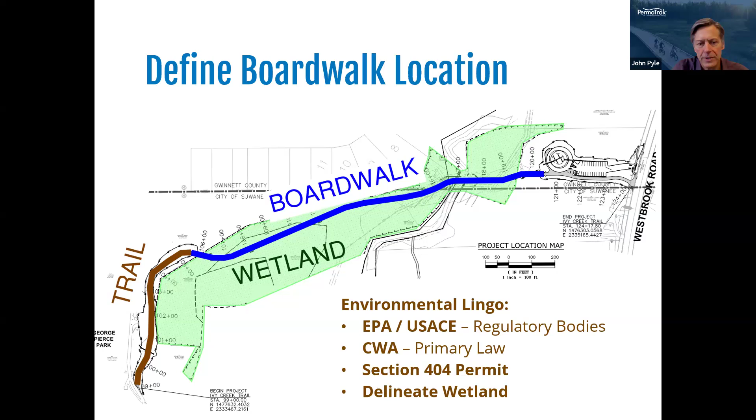The authority for that was granted through the Clean Water Act back in 1972, and there's a Section 404, which is that permitting process, which helps to define that delineated wetland or stream boundaries. This one slide could be its own one hour lunch and learn on how to navigate the environmental and the regulatory hurdles, and there are people who are much more familiar with that than myself. But it's really important to have a good wetland consultant on board for these kind of projects.

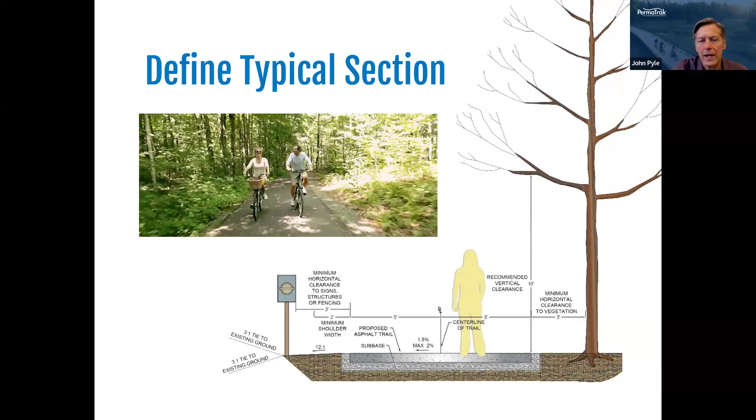So once you figured out that you do have this wetland body of water that you have to go through, part of your trail definition is you have to think a little bit about the usage, which will help inform how wide that trail needs to be. If it's just for single use hikers, it may be more narrow, but what we often see is if it's multi-use with hikers and bikers, it might be 10 to 12 feet wide. You also oftentimes need to consider some buffers on the shoulders for vegetation or signage, as well as overhead obstructions.

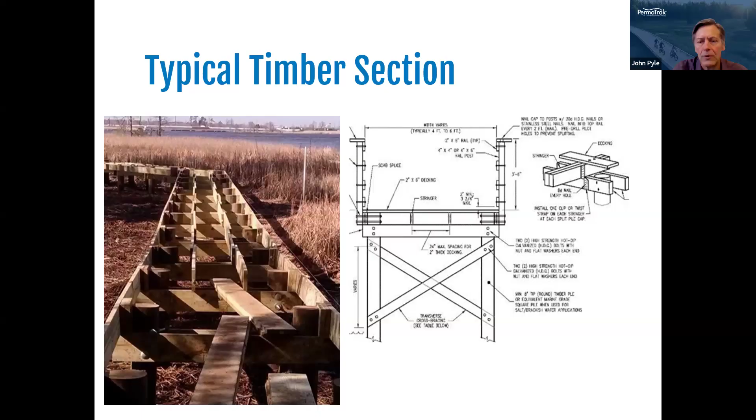Pivoting to the structure, what we typically see for boardwalks is three general types: timber/wood traditional, composite, or precast concrete. You've probably all seen timber boardwalks—here's a good example of what that looks like. You'll have stringers running longitudinally, often on a 16-inch spacing, spanning from pier to pier, usually about a 10-foot span between piers, with a wooden board decking.

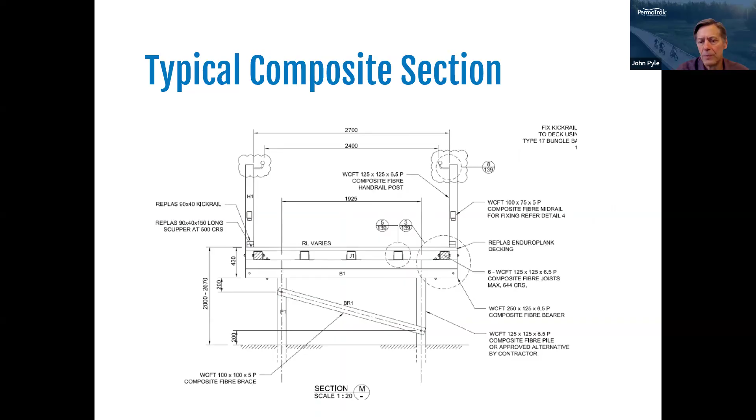Composite structures are very similar to wood in that you'll have multiple stringers, or multiple longitudinal members, giving the structural support, and then a decking that makes up the walking surface. All of that will be supported by some type of foundation with a header—you need the headers to provide support for the multiple stringers. Again, usually you'll see spans in the 10 to 12 foot range for both wood and composite.

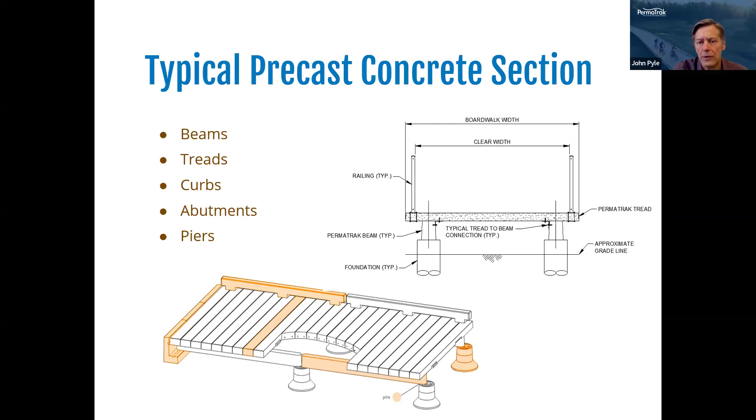The other option we see are precast concrete boardwalk systems. These consist of a two beam line structural support rather than multiple stringers on a 16-inch center—you see that cross section on the right hand of the page. The two beam lines will span from pier to pier. With a precast system, typically you're seeing longer spans, 20 to 24 feet is more typical for a precast concrete boardwalk. Then you'll have treads or deck members that make up the walking surface, running in the direction of travel, all supported by some kind of foundation system. I'll touch on foundations a little further, but those are the three main types of systems you might see from a material standpoint.

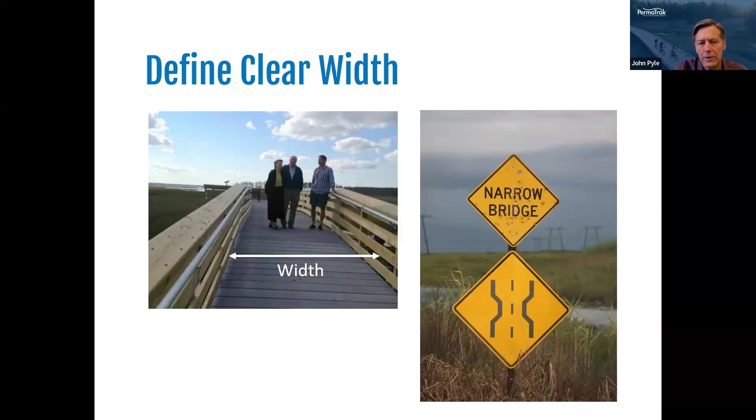Another thing to think about is your clear width. That'll be driven by the intended usage of the trail—oftentimes, for a multi-use trail, it's 10 to 12 feet wide. Clear width is that distance between the handrails or the curb. As the sign on the right shows, you want to avoid a narrow bridge. So when sizing a structure, either a bridge or a boardwalk, you want to make sure it has sufficient structure width so that the clear width between the handrails matches up with your trail approach, so you don't create an obstruction.

For the codes, there are really a couple of different codes that come into play when looking at pedestrian bridges—a boardwalk is simply a type of pedestrian bridge, if you want to think of it that way. The main overarching specification is the LRFD Bridge Design Specifications, the big highway design that AASHTO publishes. Within that document, there's a specification specific to pedestrian bridges, which is what we always recommend following for a boardwalk. There are also references to IBC, the International Building Code, which sometimes comes into play as well. Your consultant or designer on the project can help guide you to which one's most appropriate.

Within those guide codes, you'll see references to design loads to design for. For AASHTO, it'll be a combination of a 90 PSF pedestrian live load, and a vehicle wheel load based on the clear width of that boardwalk. If your structure is 7 to 10 feet clear, that would be an H5, or 10,000 pound vehicle. If you're more than 10 feet clear width—say one of these multi-use trails at 12 feet wide—AASHTO would recommend using a 20,000 pound, or H10, vehicle. This helps allow maintenance vehicles to traverse the structure.

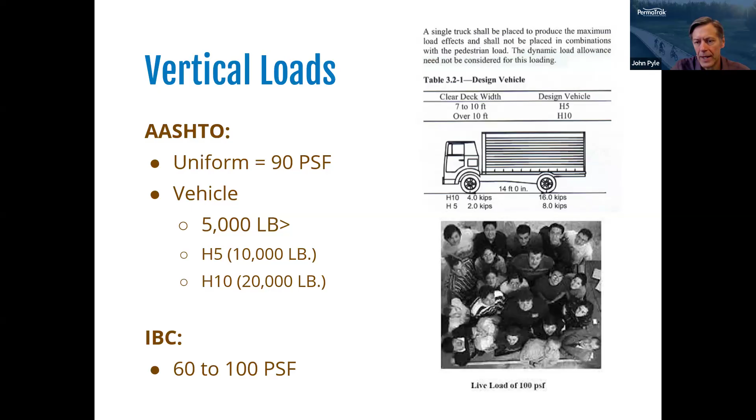IBC is a little bit different. IBC typically just refers to the pedestrian live load, either 60 to 100 PSF, depending on usage. That picture on the bottom right is a good representation of what a 100 PSF load looks like. Think of an elevator, people standing shoulder to shoulder - that's kind of what 100 PSF would feel like. We see that when it's more of a gathering space where you might have events with people congregating on that boardwalk.

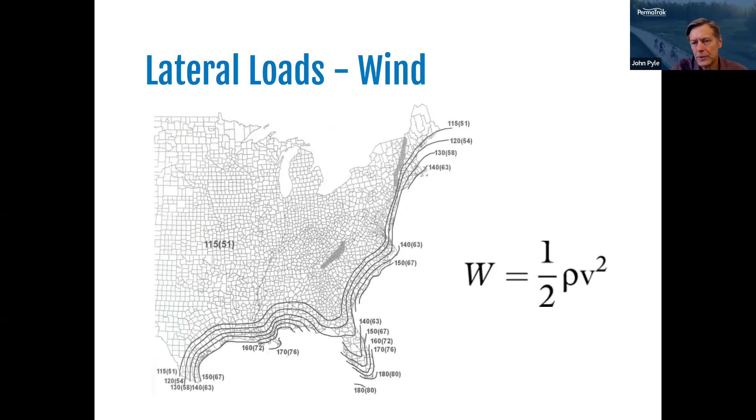Other types of loads that may come into play would be wind. We have a uniform wind load that gets applied to all structures, and as you get closer to the coast, those wind loads will increase. So just knowing where you are in the world helps inform the structural engineer on what the appropriate wind load would be. Certain areas we get into seismic loading.

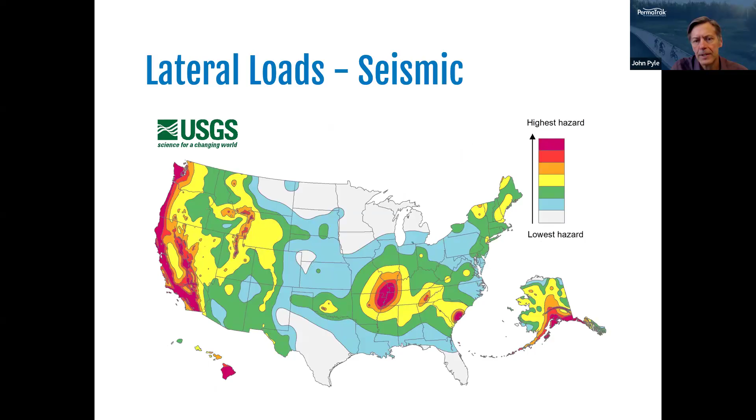Certainly on the West Coast we're all familiar with the earthquake threat, but you'll notice there's some pretty significant seismic activity on the East Coast as well, particularly down in the Charleston area - it's a very active fault line. Western North Carolina has some seismic considerations as well. Again, just something that needs to be taken into consideration.

Other types of loads would be hydraulic loads. We see that quite a bit when you're spanning a river or a stream - you need to think about that. If you're anticipating maintenance vehicles or emergency vehicles accessing the structure, braking loads or braking forces come into play. In some locations, mountainous areas or out west or up north, you'll see a snow load, which is basically another dead load you have to account for.

And then there's also temperature and shrinkage considerations. Structures can grow or shrink based on temperature, so the longer the structure, the bigger that impact could be. It just gets taken into consideration.

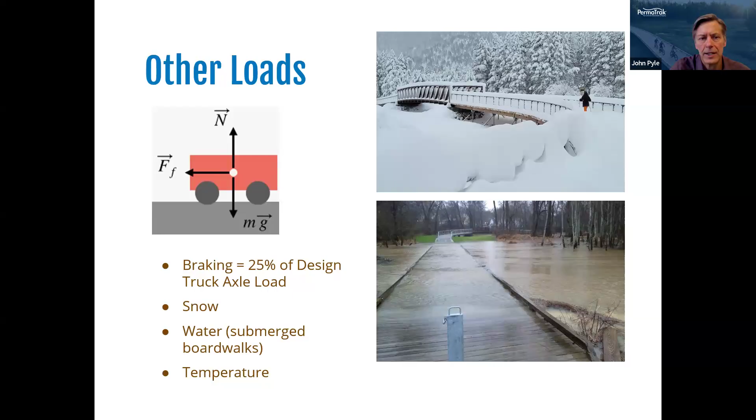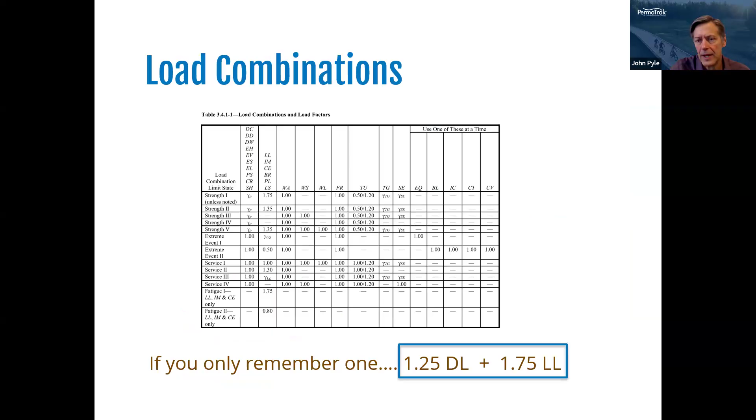To sum up the load combinations, just keep in mind that once you have the dead loads, which is just the weight of the structure, and the live loads, the vehicles or the people, then a factor gets applied to each one. You have a factor of safety so that there's reassurance the structure is going to perform.

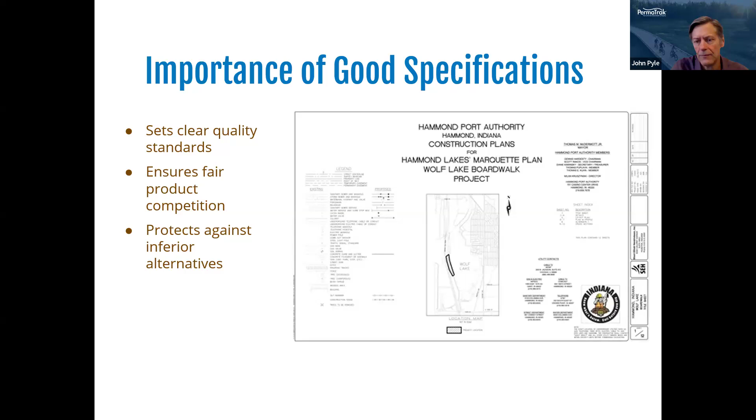Another aspect we always recommend is making sure your project has a good set of specifications. It helps set a clear quality standard not only for the structure supplier, like PermaTrak or any other entity providing the structure, but also sets the standard for the contractor, helping them understand what you want as an owner. This ensures that when the project's built, you get a structure delivered that is what you were anticipating, and everybody is on the same page from a bidder standpoint and a manufacturer standpoint, with clear specifications that also protect against an inferior alternate being proposed that you may not have wanted on your project.

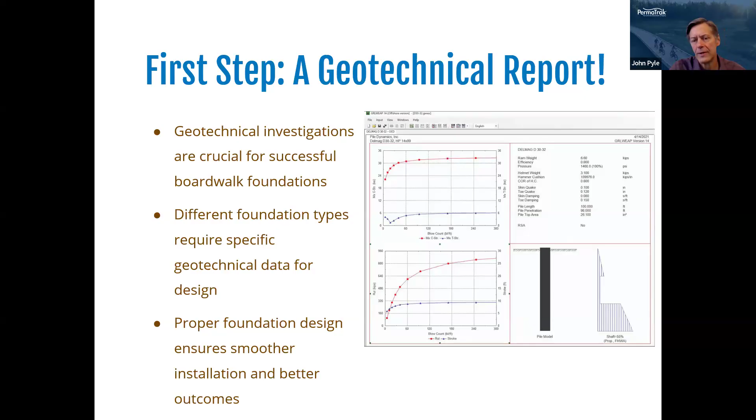I mentioned foundations earlier. One of the most critical parts of any structure is what's holding it up. This is a very big cost driver, not only for the materials of the foundation, but also for installation by the contractor. Really, the only way to understand what your foundation needs to be is to get a geotechnical report done, and we always encourage getting that done early in the process - having a geotechnical engineer go out, do some borings at the location of your bridge or boardwalk, and then make a recommendation on what the best foundation type will be for your particular project.

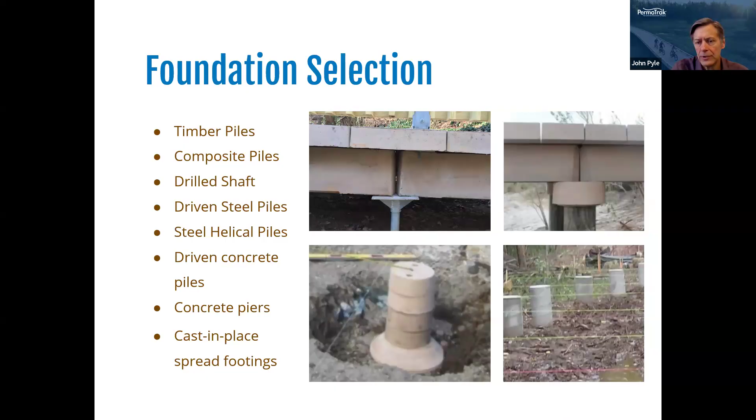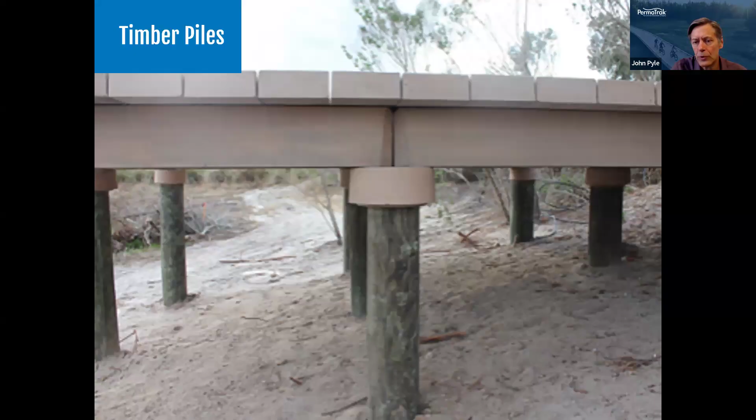Here's a good look at some examples of the different types of foundations we most often see - everything from simple spread foundations, at grade or just below grade, to driven deep foundations. As you can imagine, there's a wide range of cost associated with these different foundations. Deep foundations, pile types - these are going to be your more expensive foundations, but oftentimes, especially when you're in wetland areas with very poor soils, it's just what you have to do to support the structure.

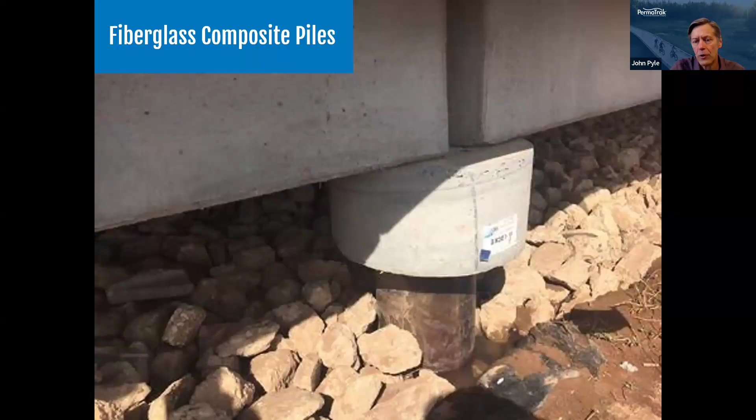We see timber piles used quite often. Fiberglass, the FRP fiber reinforced polymer composite piles, are a good option. Drilled shaft concrete or concrete caissons are a nice option when you need lateral stability, when you have hydraulic forces or seismic forces that have a high lateral component.

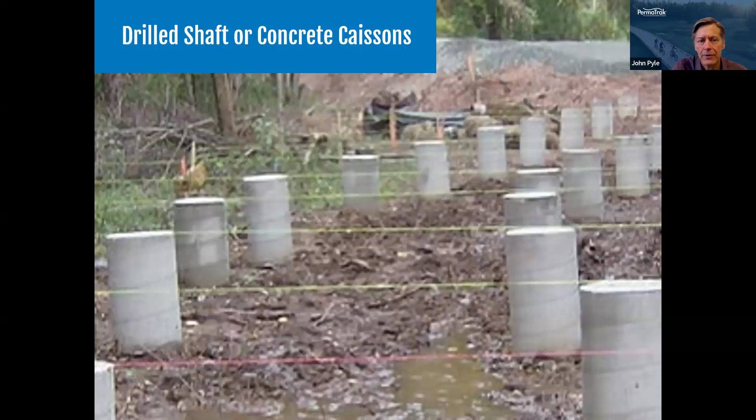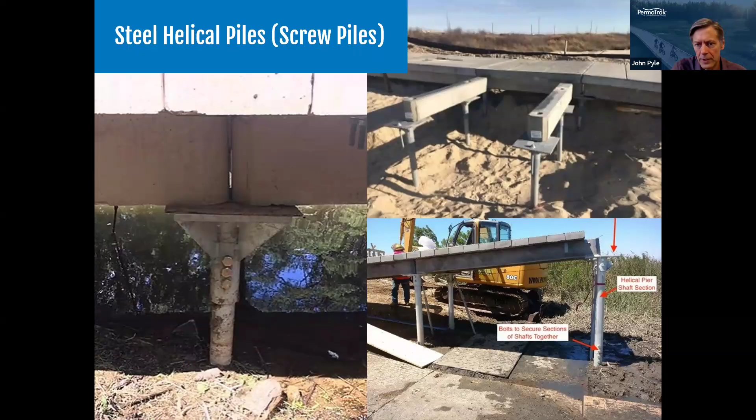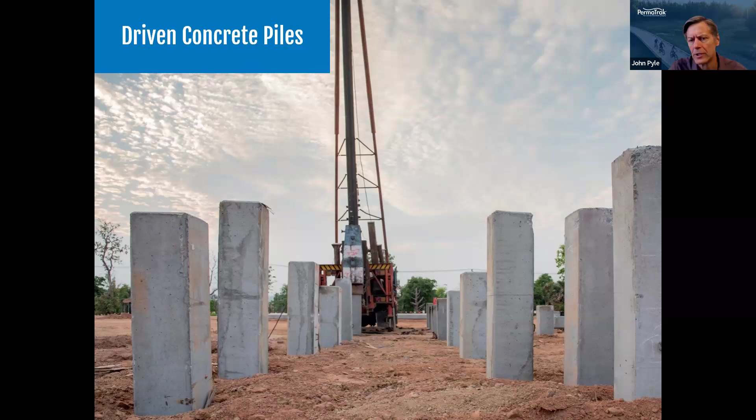Driven steel, either H piles or pipe piles, we see quite often. Helical piers is a system we see being utilized more and more. Really it's a deep foundation, but it doesn't require the heavy driving equipment you see with a driven pile. Lastly, you can drive precast concrete piles, pre-stressed concrete piles. We don't see those as often. More often you might see those in a coastal environment where you have deep requirements to drive and high lateral forces.

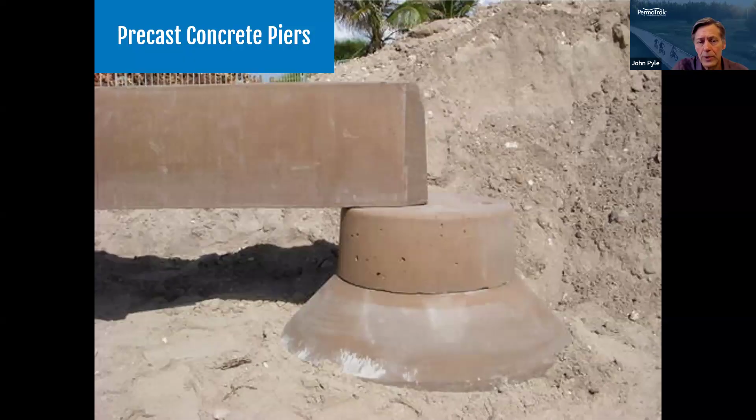Shallow foundations are probably going to be your most cost effective, but their use is a little limited and strictly driven by your geotechnical conditions. You can have a precast foundation or a cast-in-place concrete foundation. Either of those would be sufficient or a good option for you.

The other question that comes up is whether you need a handrail, a curb, or anything at all. This goes back to the ADA requirements that most designers follow. If you're less than 30 inches from the walking surface to the existing ground, you don't really need anything - it's a safety consideration. Oftentimes we'll see a curb utilized just to keep people from accidentally stepping off or pushing a stroller off the side of the boardwalk, so it's a good way to keep people on the structure.

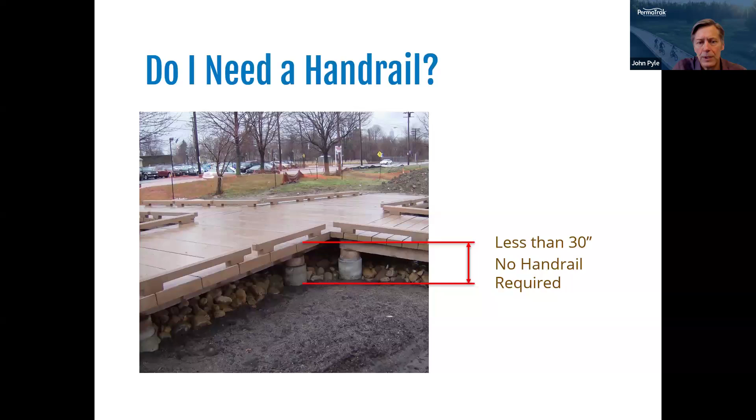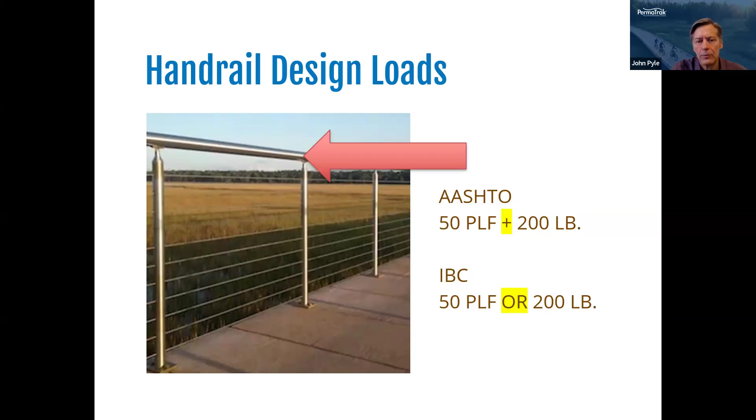When you exceed 30 inches, then you're into a railing for fall protection. Much like I mentioned with AASHTO and IBC design loads and codes earlier, there are design codes for railing as well. AASHTO applies two loads simultaneously - a 50-pound per linear foot line load plus a point load of 200 pounds. IBC looks at those independently, so it's a different way of applying the loads. The AASHTO load will result in a little more robust railing. The IBC works fine, but the AASHTO loading is a little more robust, and we see that more often with linear transportation projects.

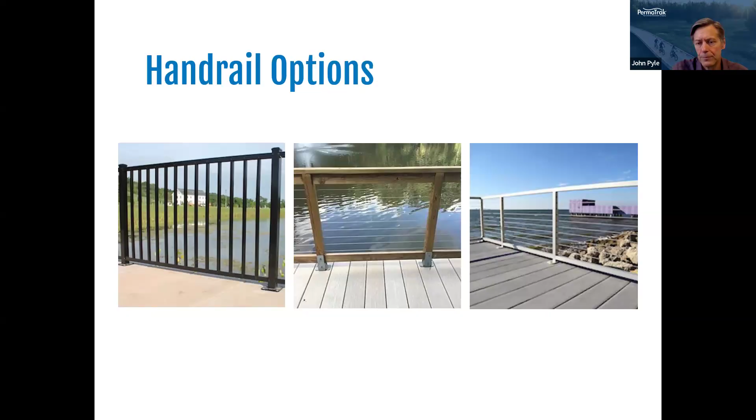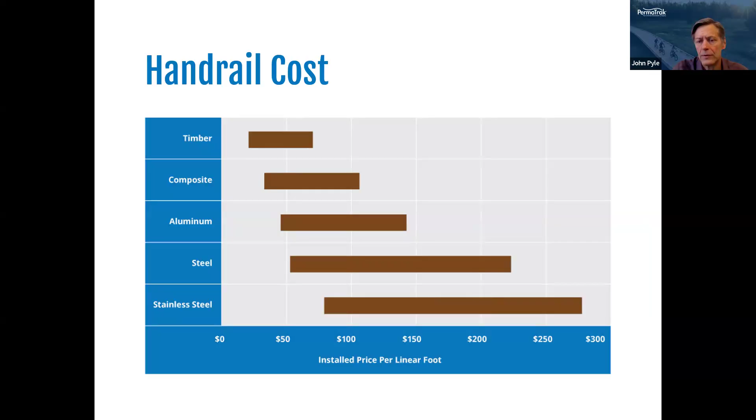For handrail options, you can literally use any type of handrail on a boardwalk you'd like from an aesthetic standpoint - metal, wood, aluminum, galvanized steel. As with anything, the material does have a cost implication. The most cost-effective approach would be a timber handrail. You'll have to do some maintenance and possibly replace it over time, but it's more cost-effective than, say, a fully stainless steel system with a frame and stainless steel cable. So consider the aesthetic, the cost, and the future maintenance of that handrail.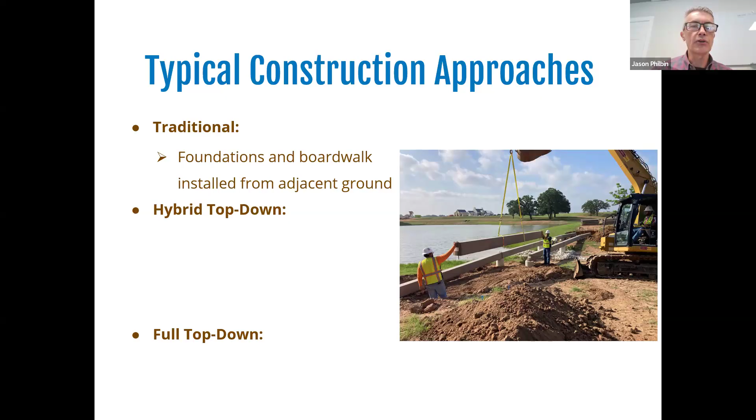Contractors love that. Now, if you do a hybrid top-down construction process, think about your wetlands where you want to put a boardwalk. You might say, 'we're limited to a corridor, and limited to the disturbance we can do to the ground.' This goes back to your permitting requirements. But ask: can the design and construction team build the foundations from the ground, then get out of the ground and set all the components from the top?

You can see here in the picture, the foundations were concrete piers, all done from the ground. Then the contractor came back and proceeded to crawl across the top of those foundation systems and set those pieces in front of themselves. This slows the process down and makes it more expensive, because time is money in the contractor's world.

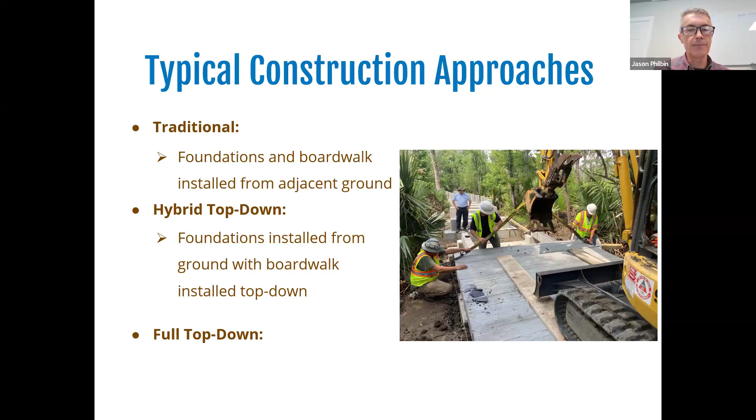The third type is what we call full top-down construction. If you have the most extreme permitting restrictions where you're not allowed to even touch the ground, sometimes you can't move any dirt. We have that going on right now in Atlanta, Georgia. Everything has to be installed from the top—the foundations and all the components—everything delivered from the top, theoretically not even touching the ground.

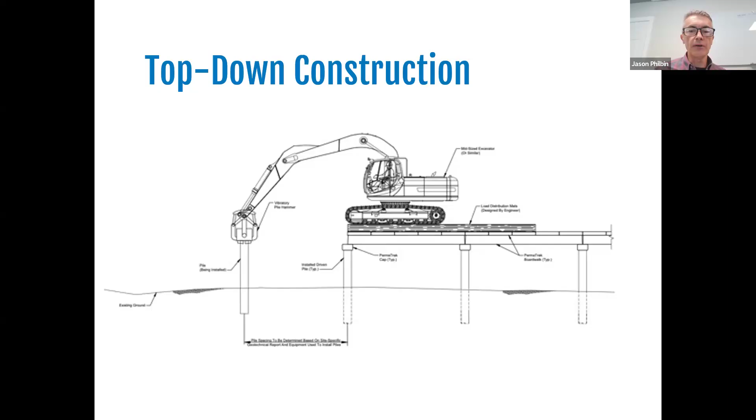Super important, and then the material selection. Now you've gone through all these evaluations and you're saying, okay, time to make a decision—what material do I choose? You've certainly heard from us about the precast option. There are advantages, there are disadvantages, there's timber, and there's composites. Those are primarily the three that you think of.

Most people think of timber first. You're going to be considering design criteria—can it support those loads that John talked about with the AASHTO bridge code? Does the structural engineer think you can make it work with wood or plastic? What about the aesthetics? Typically, timber is looked at as very high on aesthetics—people like the look of a timber boardwalk. Durability is important also, depending on where you are.

Can it be subjected to the environment? Slip resistance is extremely important here in Mecklenburg County. I know that slip resistance is very important, and that is driving their decision in moving from a timber walking surface to a concrete walking surface based on slip resistance.

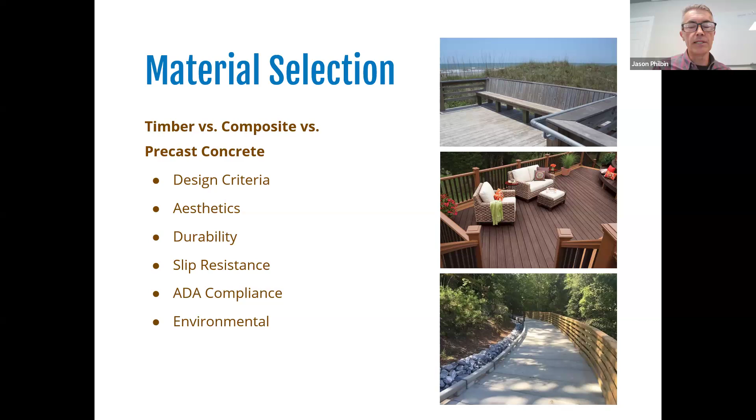ADA compliance is, of course, important too. That might come into play in how you fund the project—your funding source may say it absolutely needs to be compliant with ADA guidelines. So now you're thinking about whether these pieces can remain ADA compliant over the life of the structure. And then there's, of course, environmental reasons to choose one material over the other. Timber, composite, and precast all have their advantages in how you choose those.

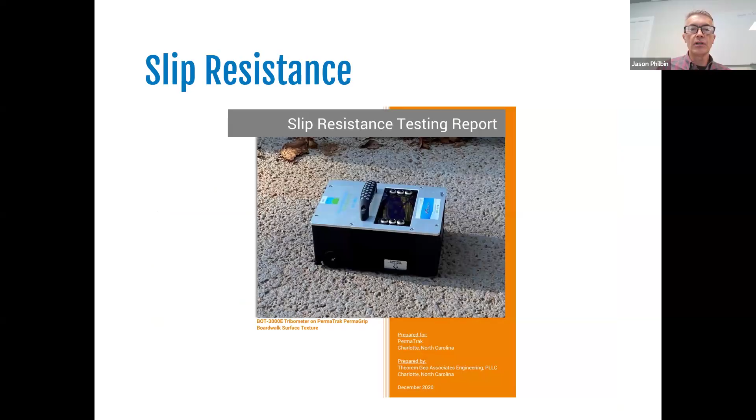So slip resistance, what does that mean? There's a fancy machine you can use to test the slip resistance of boardwalks. That's been done locally—the local consultant did this. They tested timber, composite, and precast, and here's what they came up with. There are no surprises here.

You look at the dynamic coefficient of friction, which tells you how good it is for slippage. If you're above 0.42, the ANSI protocol says you're good, and all the materials tested were fine. The problem is when it gets wet. Put water on a concrete, timber, or composite surface, and the results are very different. Concrete, when wet, is just as effective as when dry—a little worse, but not as bad.

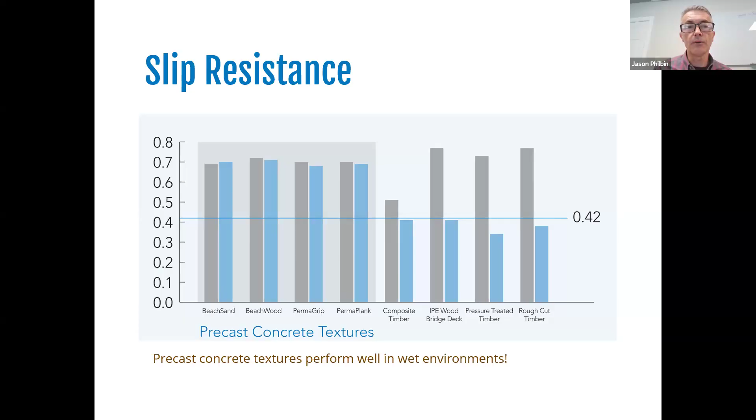Now when you go to timber or composite, slip resistance becomes a problem. I'm a cyclist, and I can attest to that. I've ridden and run on timber boardwalks when wet, and you can slip on those corners, there's no doubt about it. I've seen it happen, and I've heard it from owners calling with problems with slip resistance.

So, sort of intuitive, right? Now, ADA compliance—what do we mean by that? Generally there are a couple things you have to comply with. One is the horizontal separation of gaps in the planks, and the vertical separation of the pieces—a trip hazard. Are you creating a trip hazard for walkers and users?

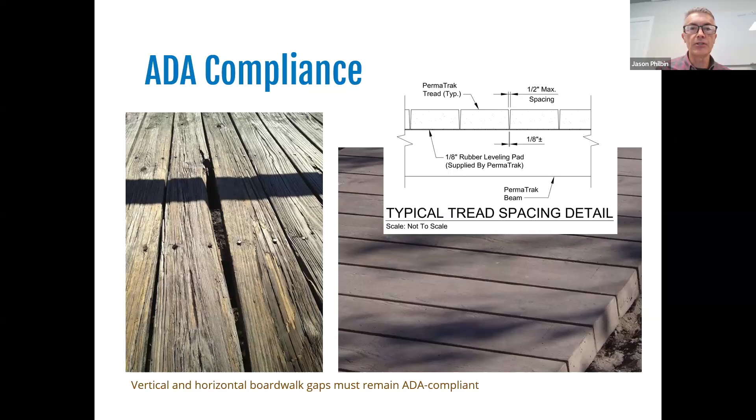On the boardwalk system, you can imagine all of these materials work—some perform better than others. On day one, they can all certainly meet that requirement, but with deterioration in those components, one is going to outperform the other. Okay, let's go to the next slide.

And durability—this is very intuitive, I'm sure. Timber, composite, and precast concrete have very different lifespans. From my experience doing this for over 16 years, a timber boardwalk in the Carolinas—owners like you have told me it can last anywhere from as little as 5 years up to 25 years. That's the range you told us, 5 to 25 years.

Composite boardwalks, I don't see a lot on boardwalks, but I do see them a lot on residential platforms. Certainly the longevity of a composite boardwalk stretches a little further than timber. My experience with precast concrete is over 30 years, and the Army Corps of Engineers declares precast concrete suitable and durable for a 50 to 75-year design life. That's not something we made up—that's established for precast concrete products.

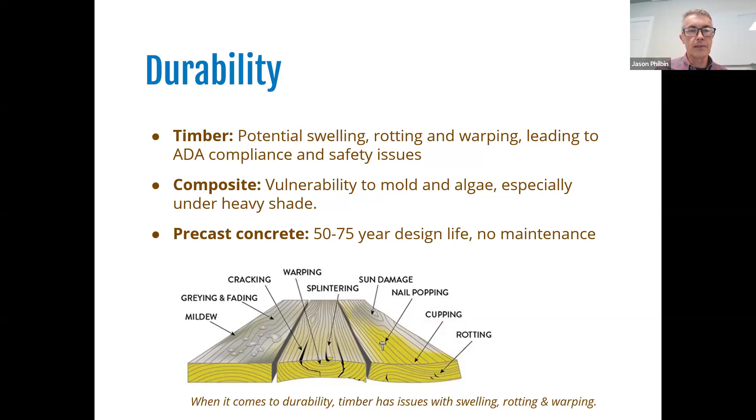So you get what you pay for, from top to bottom, on the different materials. Just something to think about.

Aesthetics—timber typically wins out. Timber is what people think of; they like the timber product. It's softer, feels more part of the environment, and it's typically the traditional, go-to material choice. I can't disagree that they're beautiful looking when first installed.

Composite has come on the market, and there are several composite boardwalk products—think of Trex. Trex is one product with beautiful decking panels; I see it a lot on residential decking applications. It doesn't quite have the strength of concrete, but it's a good product if all you need is to wrap around a pool or your home. On occasion it's been used on boardwalks, but it needs proper support underneath to take the loads.

With our precast concrete system, I'll tell you aesthetics is probably one of our disadvantages—people think it's cold and harsh. But our product, Permatrack, has a texture on top. We've listened to the design community, and they've said they want timber as a texture. Some people love that, some think it looks fake. Another option is a sandblast texture, which gives a lot more slip resistance. Those are the two most common textures we've done.

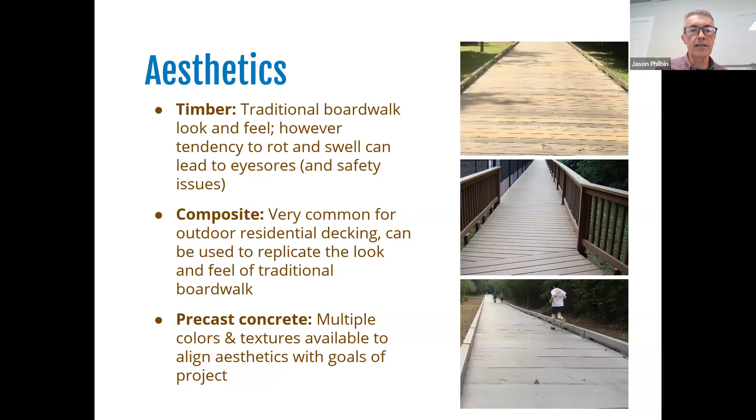We also offer color—an integral color—and we've done tans, browns, even green, red, and clay to suit the environment. So precast concrete does have the flexibility of modifying from an aesthetic standpoint.

Environmental reasons, of course—you understand that timber typically has chemical treatment, not only on the decking pieces but the piles and the railings. There is that potential environmental disadvantage. The composites, as you know, typically are an inert material and are not chemically treated, so that's one advantage they have, but it's not a renewable product, which is a disadvantage.

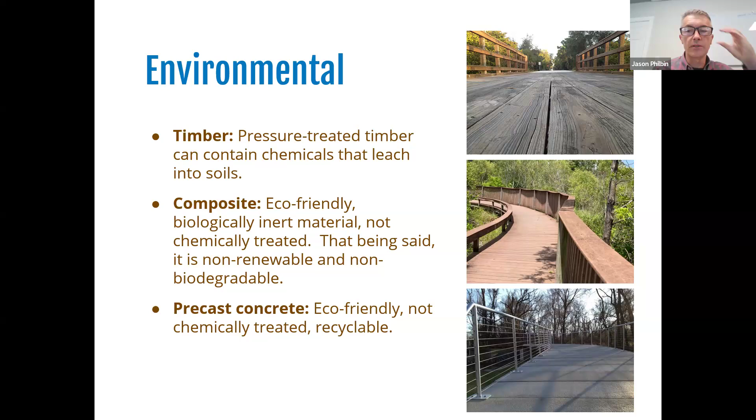Precast concrete gets a bad rap for the manufacturing process, but over the life of the structure and the recyclable nature of the product, it gains a lot of traction when you look at an LCA, or life cycle analysis, which has been done comparing the three products. I'd be happy to share those results with you if you'd like to hear more about the environmental LCA analysis on the products.

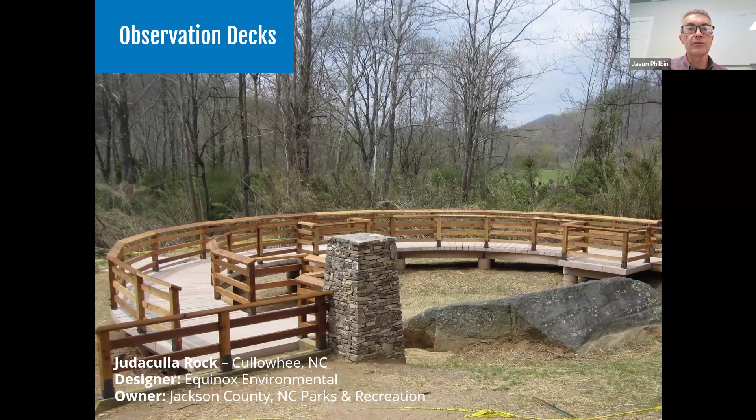We lost money—we lost $5,000 on this job, but we badly wanted to do this project. This was in Cullowhee, North Carolina. Think of this not so much as a boardwalk but as an observation platform for a petroglyph extremely important to Jackson County. They wanted to create this platform, and you see these observation bump-outs, or cantilevered platforms, on the right and in the middle, on the left. These are great ways to bring people in without disturbing the ground, to enjoy the petroglyph and learn about the historical significance of this rock to the area. Very proud of that project.

Now, here locally, Mecklenburg County has been very good to Permatrack. There's a movement—I like to say because of Permatrack from 15 years ago—away from timber decking, which is slippery, not long-term, and doesn't have the durability. The movement is toward a concrete wearing surface. Precast is one option, and poured-in-place is another.

They purely buy into a long-term product, and the Permatrack precast concrete boardwalk system is a standard for the Town of Cary. Several other towns have followed suit. If you're interested in knowing how to write a standard around a precast boardwalk, I'm happy to share what the Town of Cary has done. Since then, they've built more—we're building one more this year. There are about 20 Permatrack structures within the Town of Cary limits, so we're very happy and pleased with that partnership. They do a wonderful job.

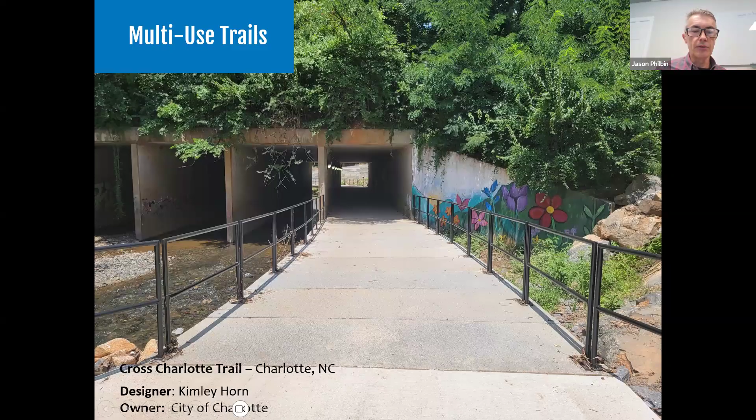Moving right along to the Cross Charlotte Trail—I know many of you have heard about that. Joe Fry is leading this effort, and it's a fantastic use of the precast product here. Think about a boardwalk going through a culvert that has four cells of water flowing through this platform, or through the tunnel.

And you can tell by looking at the railing, you see stream debris gathering on the railing post. So you know there's a lot of water, a lot of flooding, and a lot of debris going through here.

How do you think that would perform if they put a timber or a composite in this setting that runs through the tunnel? So they used the Permatrack system because they needed the durability. And I've heard from Jay Higginbotham and Bert Lynn, and they told me this thing went completely underwater, more than about 10 feet underwater. The box culverts are flowing full, and the stream debris came down.

And this was during some of the hurricane storm events, and it actually knocked down the railing that you see on there because there was such a violent velocity and stream debris, and it knocked down the railing system. Mecklenburg County had to come in and rebuild the railing system, but they were there to declare that the Permatrack did fantastic. They got what they paid for. It lasted through those storm events.

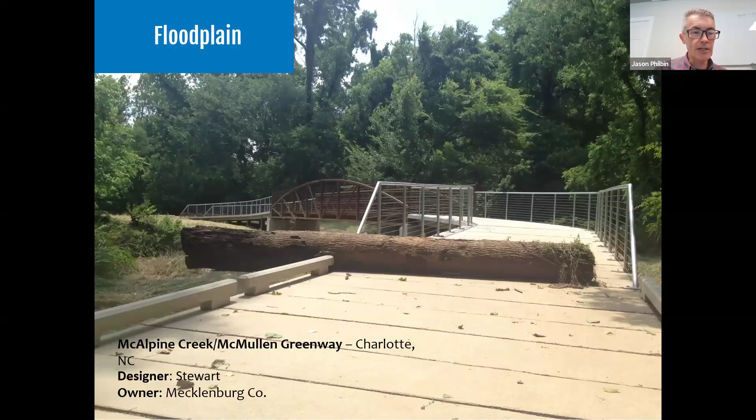And thank you, Brian. Brian giving us a thumbs up on that project. He uses that one every day. Love it. Brian, I want to see a picture of you on it.

Okay, and then this is one of my favorites. I'm a runner, I'm a triathlete, I get on the trails all the time. I love to run. And I came across this one day on my popular Saturday running route. A big tree, stream debris came down from the left, landed on the boardwalk, on the Permatrack boardwalk, and didn't do any damage. No damage. Didn't even damage those little curbs that you see on the edge.

The maintenance folks, Mike Monroe and his folks, they came by, they saw cut the tree, they pushed it off to the side, and users could continue on the boardwalk system.

But this is a great example of how crossing McAlpine Creek, or any creek for that matter, you have a trail running up to a truss bridge spanning with a larger product, a truss bridge, for example, and then a boardwalk on the far side of the picture. But again, durability really spoke and really, really paid dividends for Mecklenburg County.

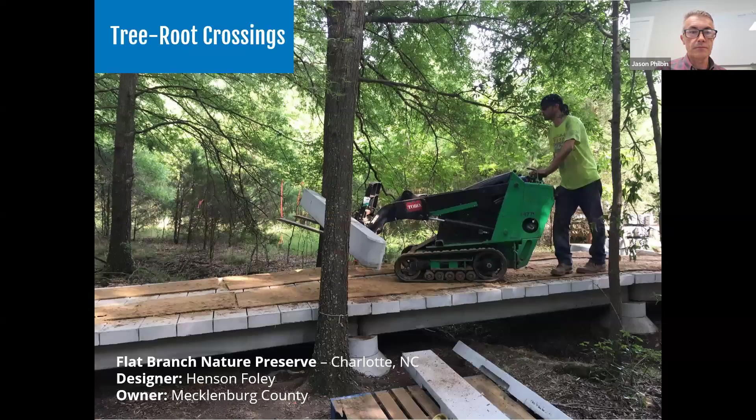This structure is 15 years old now. Okay, we're almost done. Flat Branch Nature Preserve. This is one in Charlotte, North Carolina. I include this one to show you the other end of the spectrum.

Sometimes the pieces are small. Sometimes the footings are precast like you see there. Look at the little conical shaped pieces under the gentleman's foot off to the right. Everything was set on the top.

And you'll say, well, why is that? Why didn't they just do a foundation system? They did a precast footing system because it was in a wetland and they didn't want to, we were required not to disturb the root system of the trees in this nature preserve.

So everything had to be sitting on the ground. And then maybe you're wondering, doesn't it move with the ground through seasonal changes? Yes, it does. It was one or the other: either the system moves, or you'd have to disturb the trees. The trees controlled on this particular project. The pieces, because they're modular and fairly small, can move, twist, and shift with the ground. That's exactly what this modular system is doing.

Okay, I think this is my last slide before we open it up for questions, if you have some. Julie, let me know if there's anything in the chat. John and I will answer those.